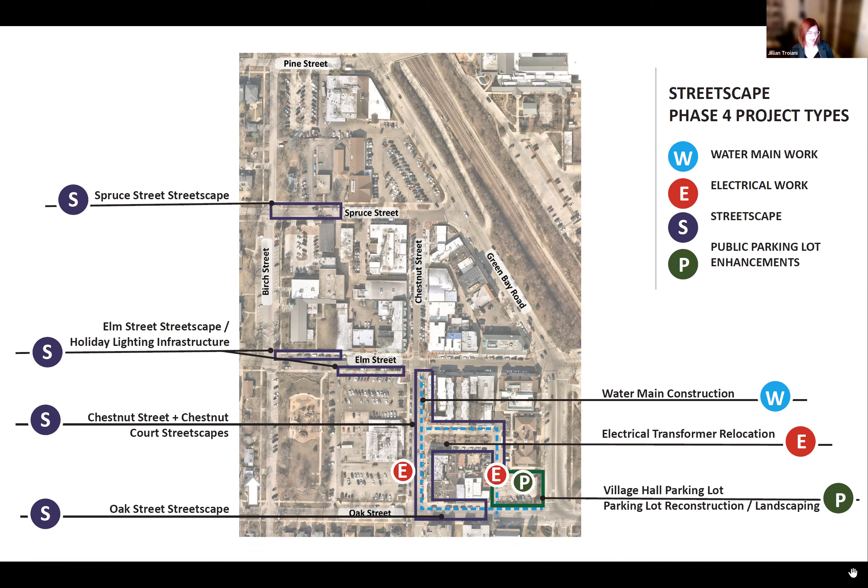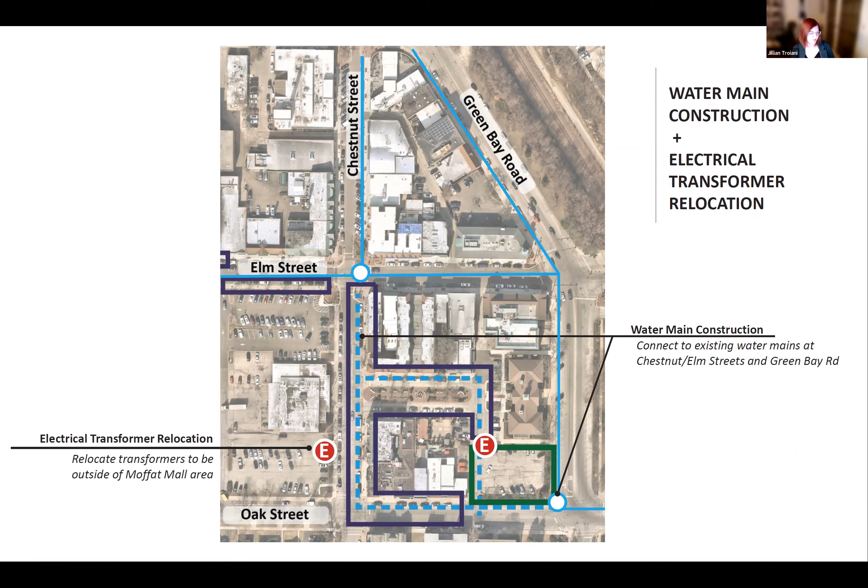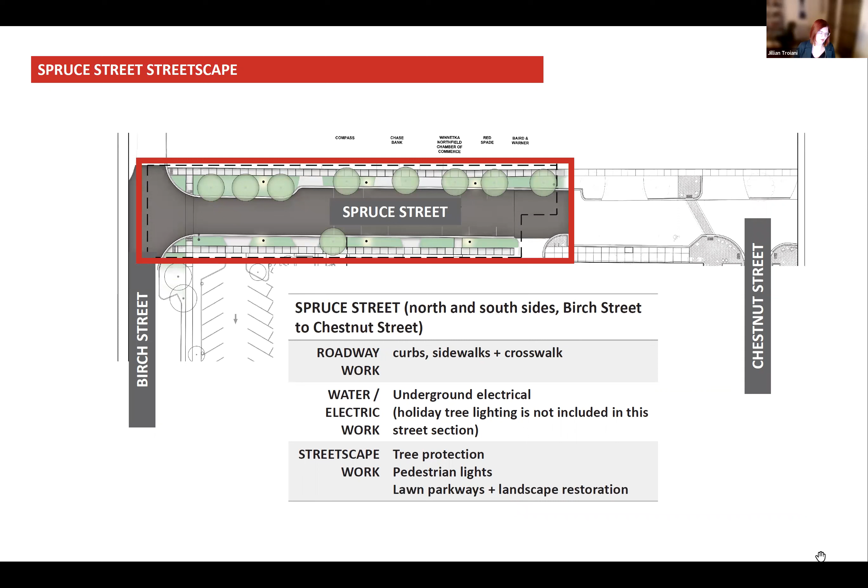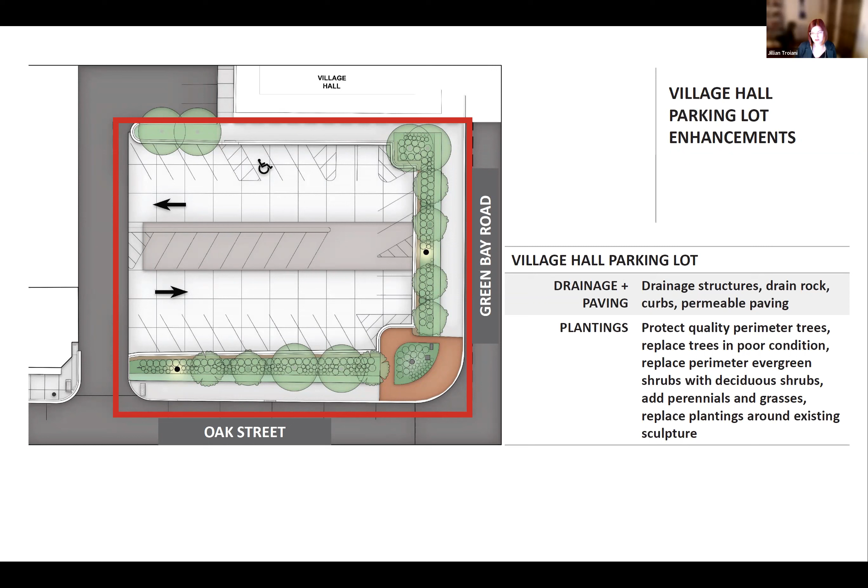Teska has worked with Ciorba and staff to develop a cost analysis for the proposed streetscape plan. The unit costs reflect what we've been seeing in other streetscape projects in the North Shore, like Lake Bluff. And at this time, I will turn it back over to Jim to discuss the budget summary.

Thank you, Jill. Before we get started on the budget slide that you see in front of you, are there any questions about the proposed design or scope of the project that you'd like to ask Jill at this time?

Actually, Jim, if I might ask Jill, the cooperation with the garden club, is there someone on the call here? We've worked with them on Dwyer Park with the butterfly garden and so on. Different club, Bob. That's a different club. That's a woman, what is that, Chris? That's the Garden Guild, garden butterfly. Yeah, no, they're at the Butterfly Garden.

And the Garden Club has always been the advocacy group, the main one, for Moffat Mall, the public space ones. Are they all in on this? Yes, we've had a few meetings with them and also David.

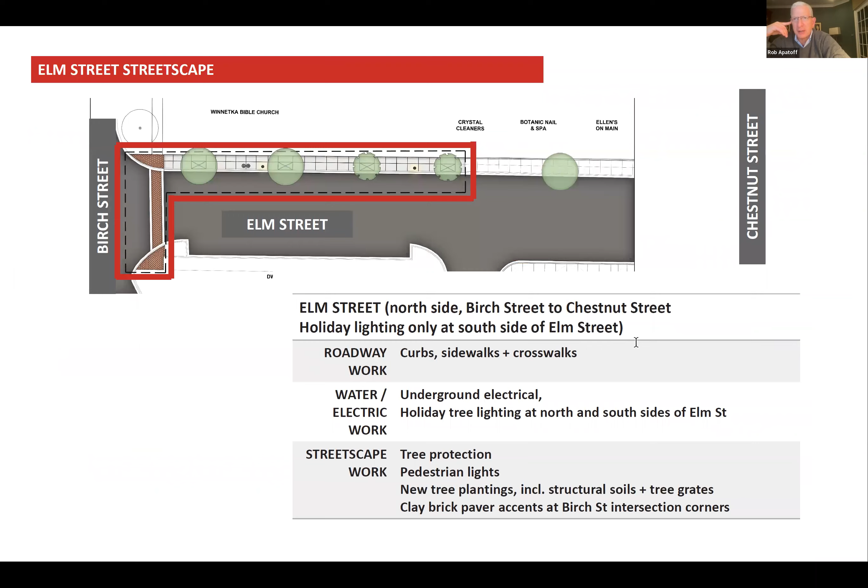All right, thank you. And the last question I have is bump outs. Could you just explain that one bump out, how it's going to work again? Because I've heard on a parking situation, people rolling over the bump outs, and people trying to back into them. That is the only other thing I've heard that has proved difficult. Yeah, so if you can see my screen still, there's just this one parking spot near the bump out. And the engineers have made sure that the turning radius for deliveries and whatnot to this area are still doable. So there's really not much parking that will be in this area, except right here.

And we're gaining or losing how many parking spaces with this? None, we actually added spaces during the first phase, Rob. Well, that's why I was wondering, I didn't know if we were gaining. I knew we were trying to at least go neutral or gain. So I was wondering if that's the same case. No, all the numbers that we projected and promised during the first phase are still valid today. Okay, good, great. And Trustee Apatoff, the curbs that are on here, barrier curbs.

Go ahead, sorry, go ahead. I'm sorry, I saw Trustee Swerk raising his hand. Oh sorry, I was just—Trustee Apatoff, I just want to let you know, these are the barrier curbs. They're not the super high back curbs where you would have to worry about backing in and hitting your bumper against them. So they're the more traditional type ones.

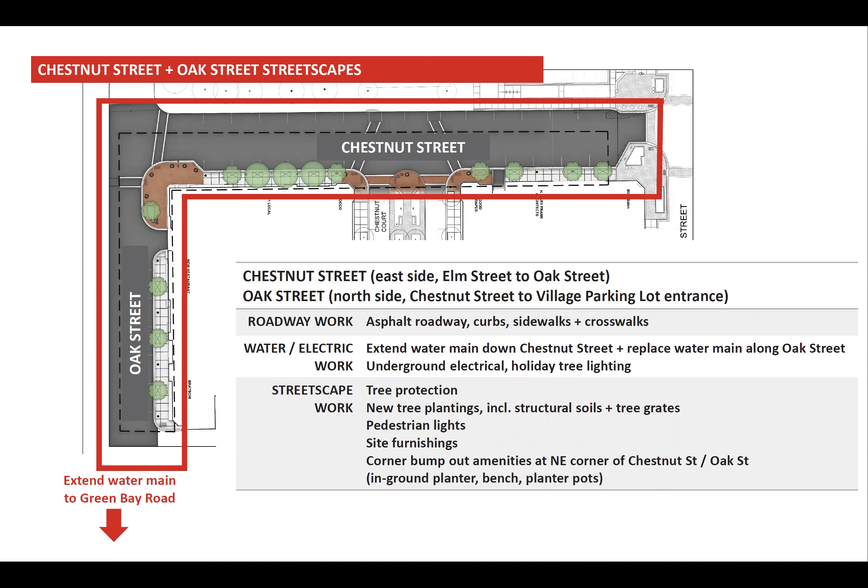Jim, do you want to speak to the pedestrian lights that are on Chestnut between Elm and Oak that are not there now? That will be, Teresa, as you've seen through the first two phases, there's the Sternberg pedestrian lights right near all the four corners by Chestnut and Elm. Going down Elm Street and north up Chestnut, those will be extended all the way down from Elm Street to Oak. That'll be a continuation, and then along the north side of Oak Street, there'll be that same similar spacing, which will enhance the lighting throughout there consistently with north of the intersection.

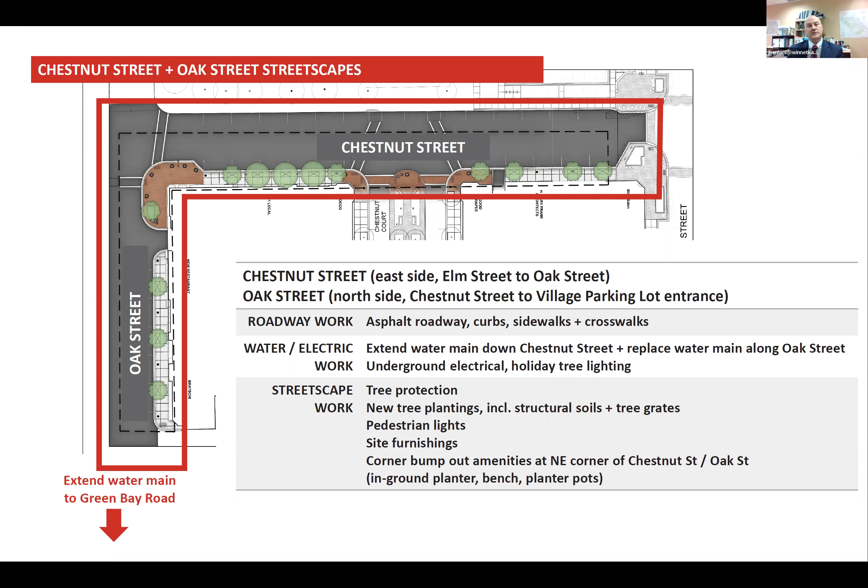In addition, as noted, the new Sternberg lights that'll be placed within Moffat Mall themselves - the other ones are the old sodium lights, these are the new LED lights - that'll be enhanced through there. That'll actually help to brighten the area within the island area itself. And as David noted, we are adding additional electrical sources to enhance the holiday lighting within there, the decor, the trees, and of course the Sternbergs will have accessibility for garland and things like that.

At the corners, specifically as you can see on this photo here, at the corner right by where your business is at, there'll be a new Sternberg light there, which is kind of the entranceway into Chestnut Court, and then the same thing directly across as well. So the lighting in there will be much more robust than it is right now. And at a pedestrian scale too, which is probably the most important thing.

That's correct. Okay, so I'll trust that - one is extension cords and power strips would have supported holiday lighting, but skipping that, if you were to stand at, and I'm going to take your word for it, Chestnut and Elm, and look down Chestnut Street, you wouldn't see any lights from Moffat Mall. I mean, it's pitch black. So what I believe you're saying is with the additional lighting, even though, if I understand the drawing correctly, the light posts within Moffat Mall aren't any closer to the street, but somehow that area is going to be visible without additional lighting in Moffat Mall, just upgraded lighting.